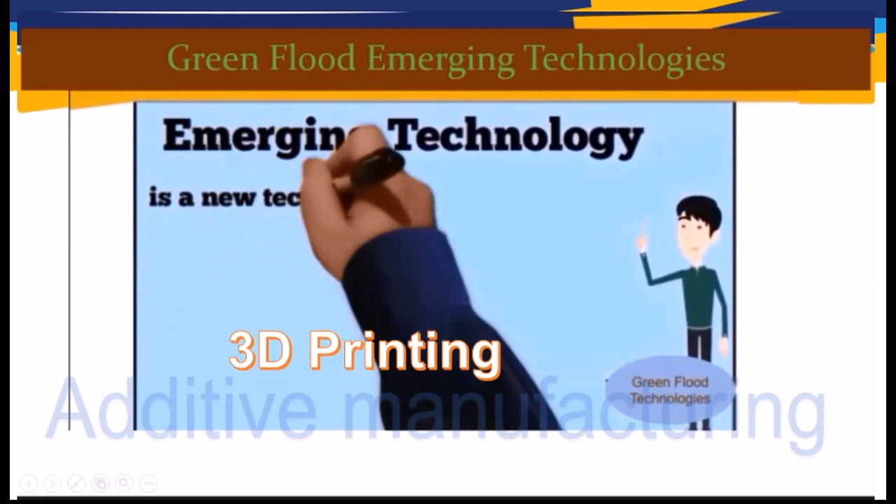Well, today I'm going to show you what is additive manufacturing and 3D printing. Are 3D printing and additive manufacturing the same thing?

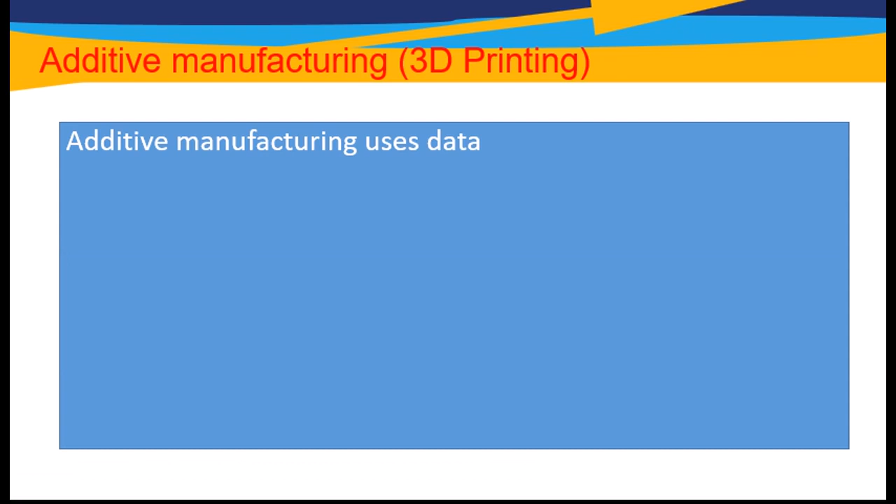Generally, we know that terms stretch over time to include more than just their default meanings. Whatever the name, new ways of fabricating directly from byte to stuff are radically changing the what, where, how, and when of making objects.

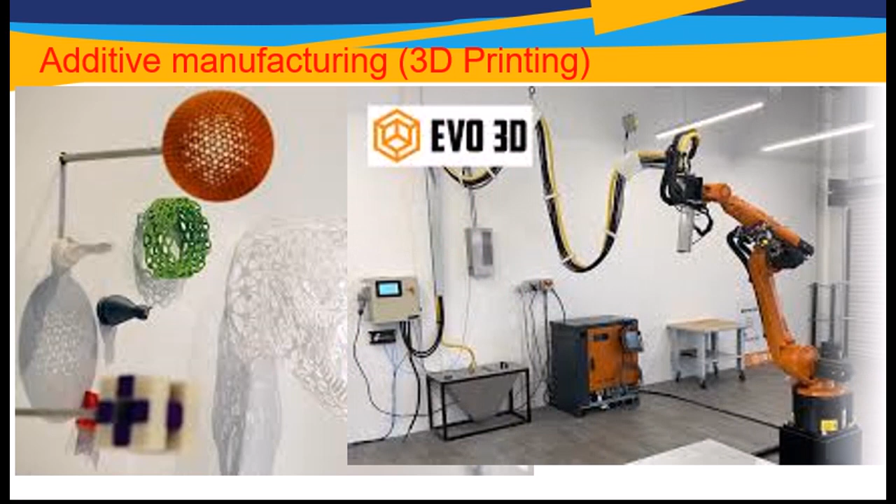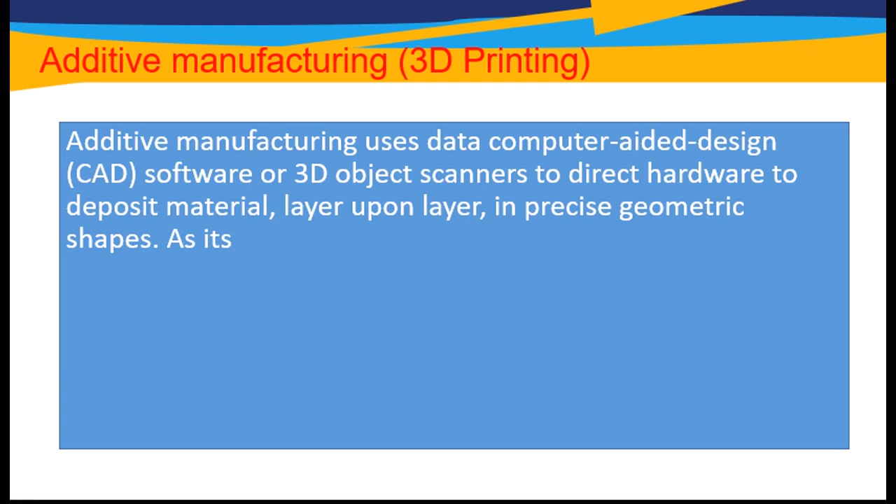What roles then do the two terms additive manufacturing and 3D printing play in describing new ways of making? Additive manufacturing uses data computer-aided design softwares or 3D objects scanners to direct hardware to deposit materials layer upon layer in precise geometric shapes. As the name implies, additive manufacturing adds material to create an object.

By contrast, when you create an object by traditional means, that means subtractive manufacturing, it is often necessary to remove materials through milling, machining, carving, shaping, or other means.

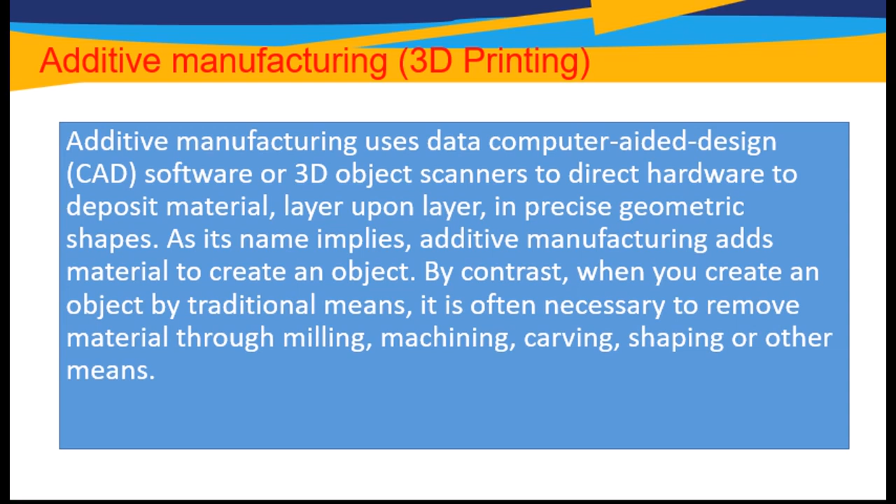Additive manufacturing, or additive layer manufacturing, is the industrial production name for 3D printing, a computer-controlled process that creates three-dimensional objects by depositing materials, usually layers.

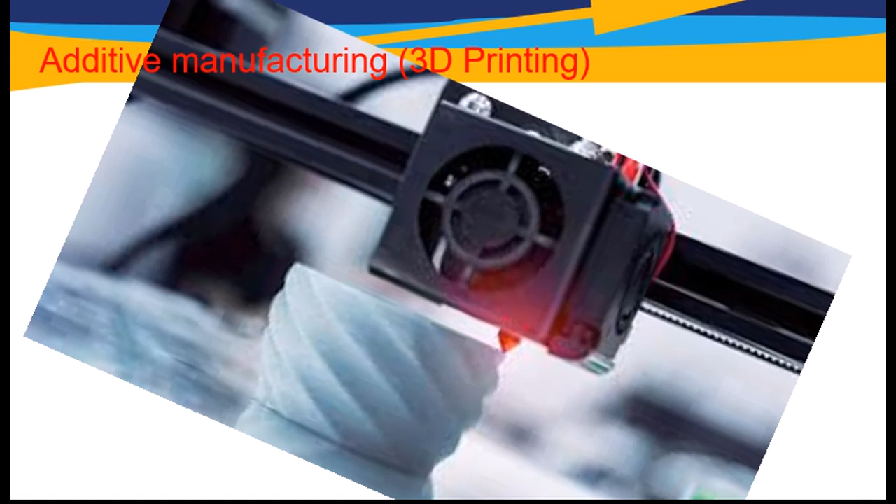When MIT invented binder jet printing in the 1980s, they wrote: 'Three-dimensional printing is a process under development at MIT for the rapid and flexible production of prototype parts, end-use parts, and tools directly from CAD models.'

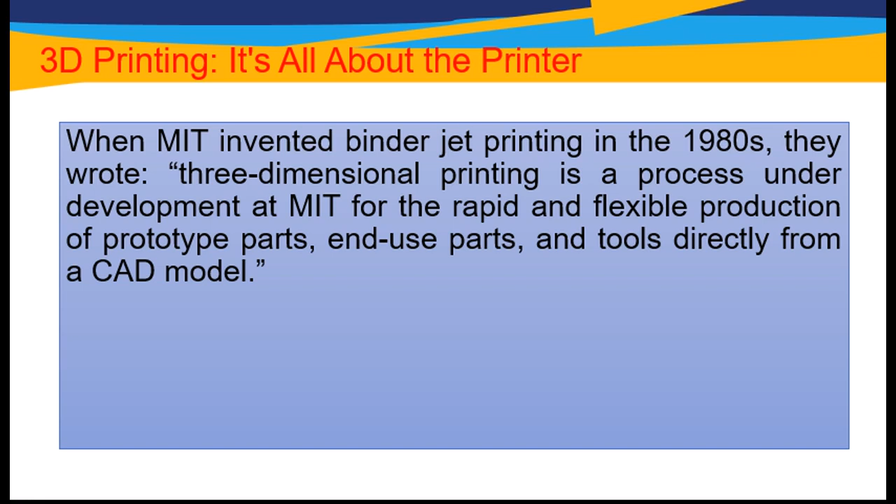Additive manufacturing was first used to develop prototypes in the 1980s. These objects were not usually functional. This process, known as rapid prototyping, allowed people to create scale models of final objects quickly without the typical setup process and cost involved in creating a prototype.

As additive manufacturing improved, its uses expanded to creating molds for final products. But by the early 2000s, additive manufacturing was being used to create functional products. More recently, companies like Boeing and General Electric have begun using additive manufacturing as an integral part of their business process.

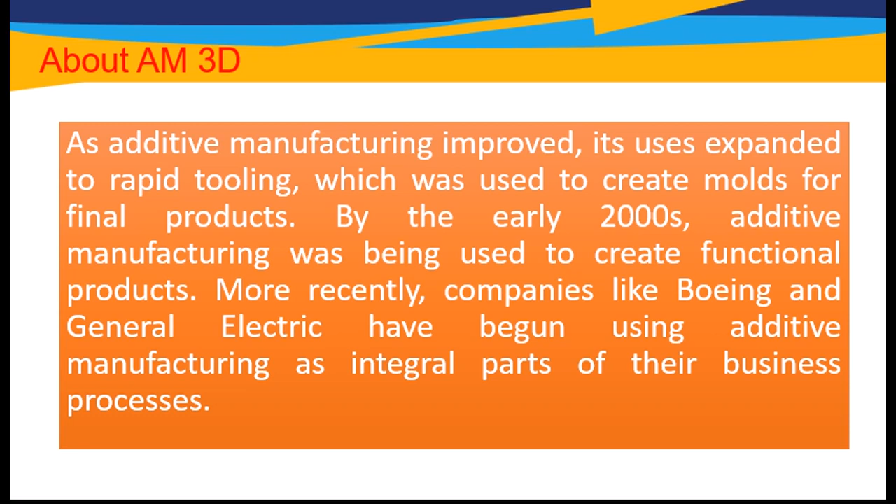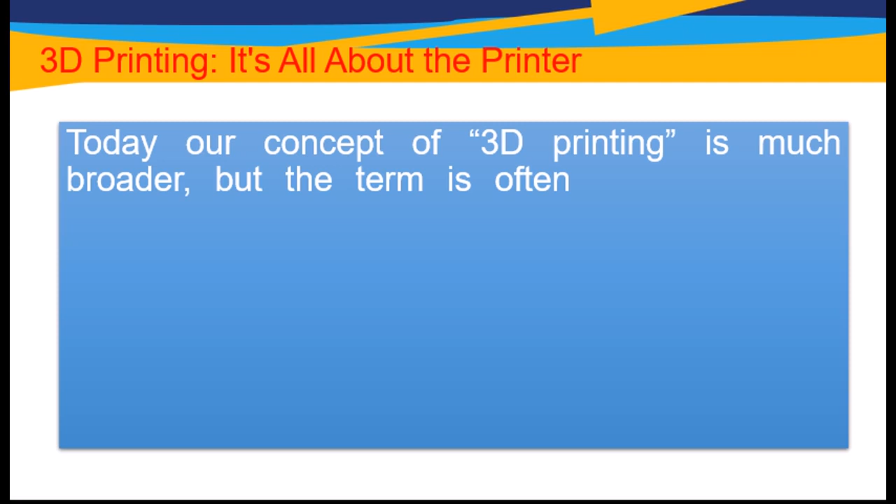Today, our concept of 3D printing is much broader, but the term is often associated with filament-based plastic printers, which are the pride and joy of many hobbyists and self-described makers. But there are also binder jet printers, laser sintering 3D printers, as well as glass and clay 3D printers.

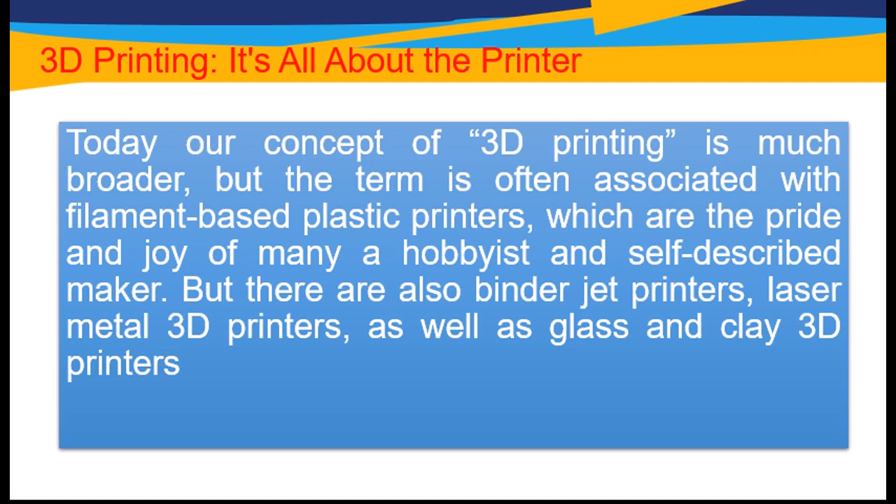Additive manufacturing versus subtractive manufacturing. Additive is the adjective. Additive means tending to or able to add. If a process is additive, it means that it is adding things. The adjective subtractive, on the other hand, means tending to or able to remove or subtract. A subtractive process is one that is removing or taking away things.

Subtractive manufacturing is the traditional way of making things. You start with a large block of something and gradually cut away bits of it until you have the desired object. We also call this process machining. Machining involves hollowing, cutting, or taking part out of a block of something. It could be a block of, for example, stock or material.

Additive manufacturing means creating 3D objects by starting with nothing, adding one superfine layer at a time. 3D printing is one type of additive manufacturing.

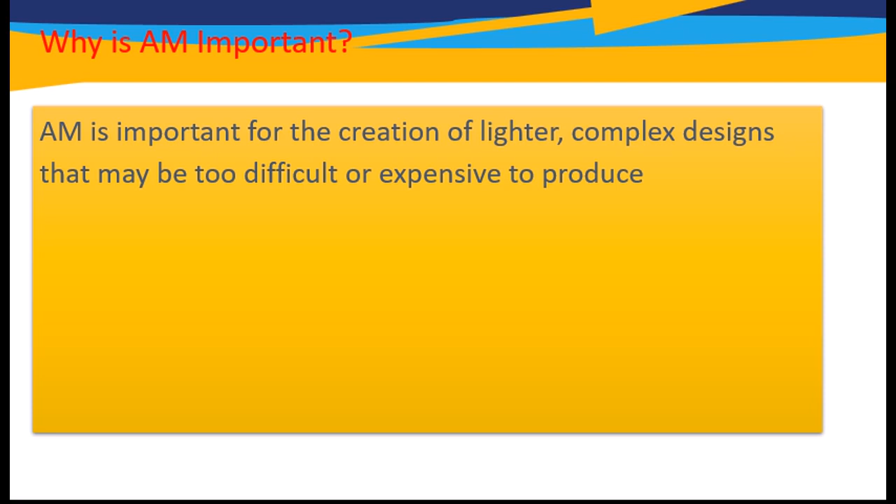Why is additive manufacturing important? Additive manufacturing is important for the creation of lighter, complex designs that may be too difficult or expensive to produce using traditional manufacturing techniques. Removing the need for molds, milling, and machining, additive manufacturing offers a range of advantages for both prototyping and production.

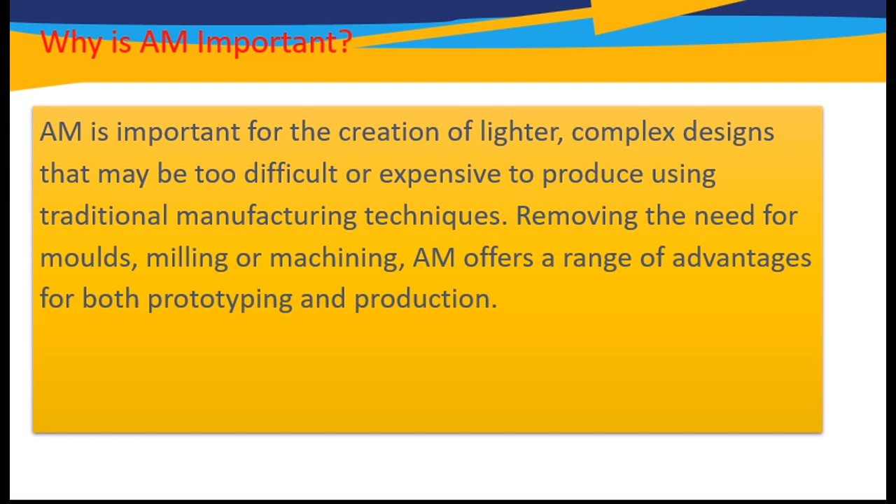What is that transformation? It may be something of a stretch to say that additive manufacturing will change the world, but it is already having a positive impact. It allows for the creation of complex designs with less material wastage compared to parts that require machining, as well as allowing for the creation of lighter structures. When these lighter structures are applied to aerospace or automotive applications, for example, they lead to fuel savings and related environmental and financial benefits.

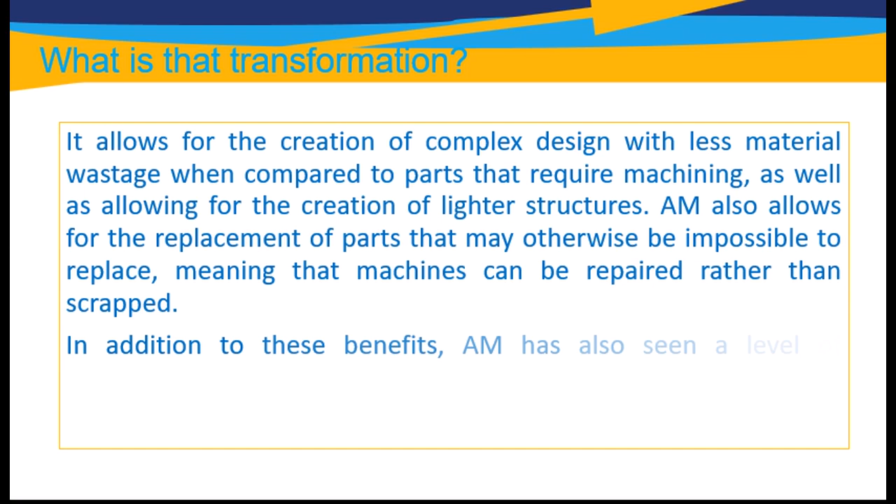Manufacturing also allows for the replacement of parts that would otherwise be impossible to replace, meaning that machines can be repaired rather than scrapped. In addition to this benefit, additive manufacturing has also seen a level of democratization of manufacturing as more people set up domestic 3D printing stations to produce their own bespoke items.

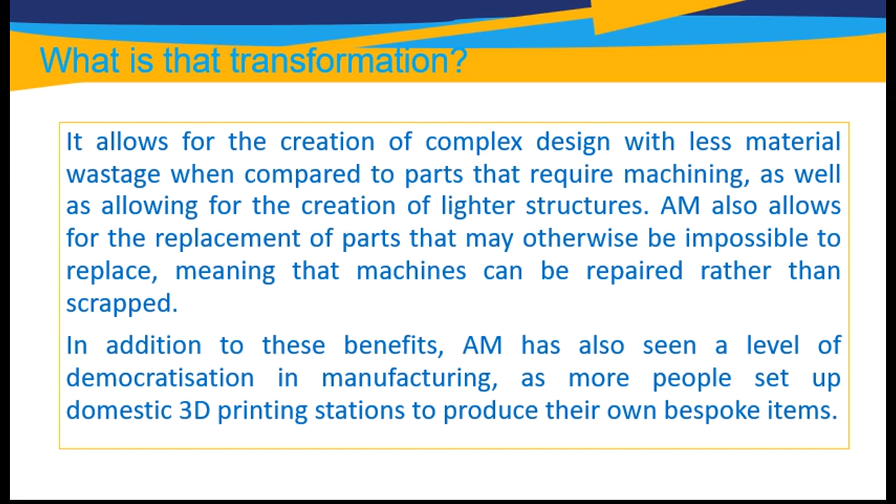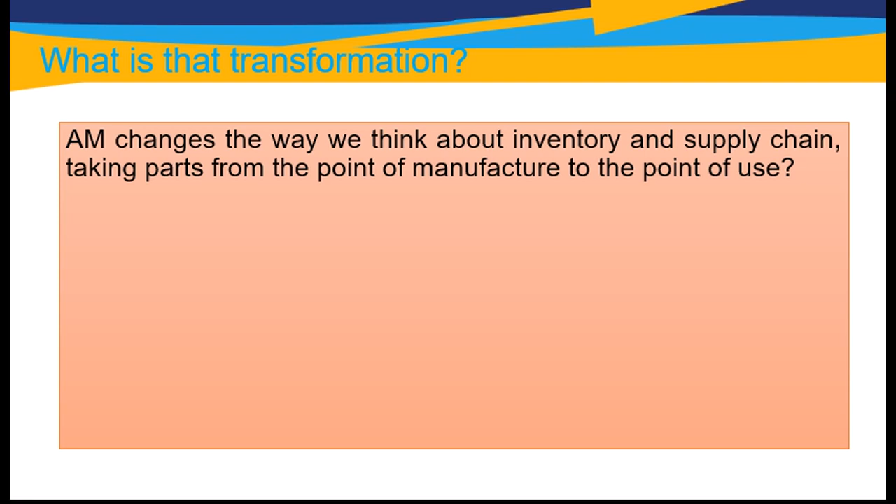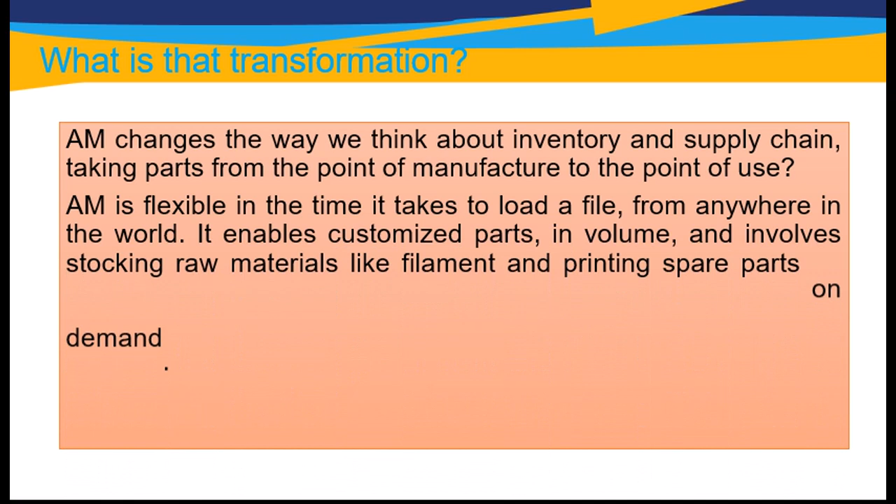Additive manufacturing technologies can be broadly divided into 3 types. The first of which is sintering, whereby the material is heated without being liquefied to create complex, high-resolution objects. Direct metal laser sintering uses metal powder, whereas selective laser sintering uses a laser on thermoplastic powder so that the particles stick together.

The second additive manufacturing technology fully melts the materials. This includes direct metal laser melting, which uses a laser to melt layers of metal powder, and electron beam melting, which uses an electron beam to melt the powder. The third broad type of technology is...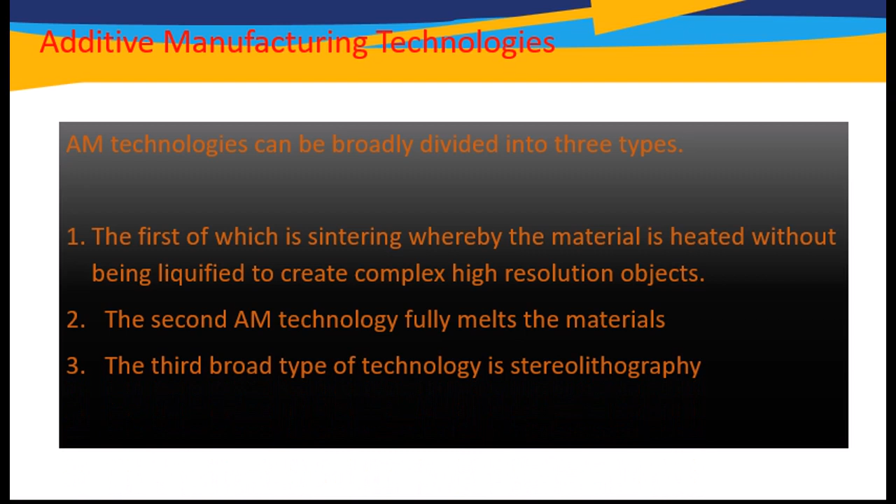Stereolithography, which uses a process called photopolymerization, whereby an ultraviolet laser is fired into a vat of photopolymer resin to create highly resistant ceramic parts able to endure extreme temperatures.

How does additive manufacturing work?

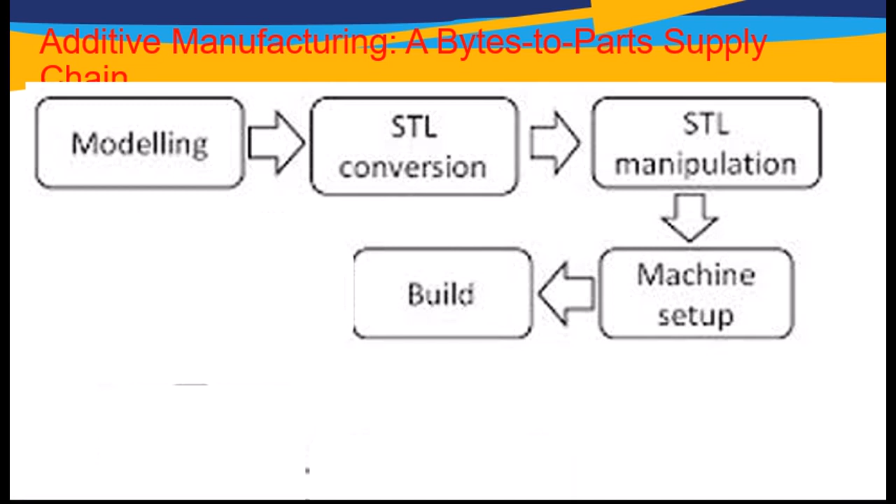Using computer design or 3D object scanners, additive manufacturing allows for the creation of objects with precise geometric shapes. These are built layer by layer, as with the 3D printing process, in contrast to traditional manufacturing, which often requires machining or other techniques to remove surplus materials.

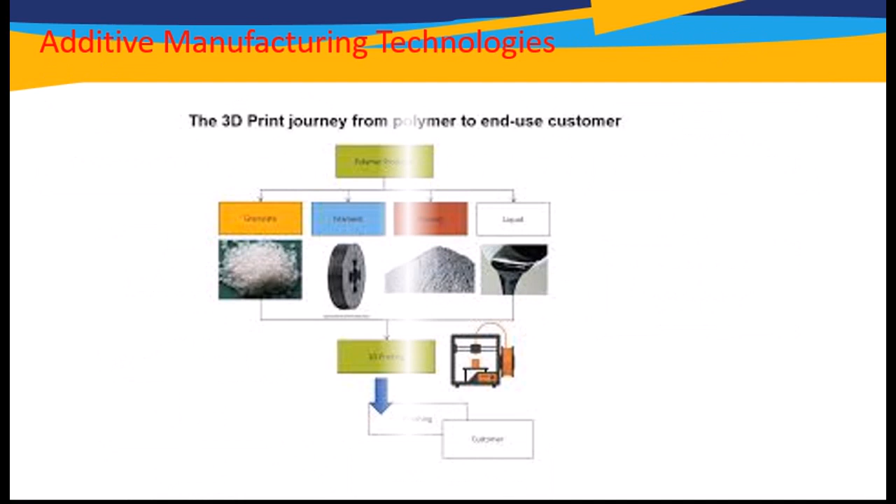Additive manufacturing processes. There are seven categories of additive manufacturing processes, including a number of distinct processes with their own standards.

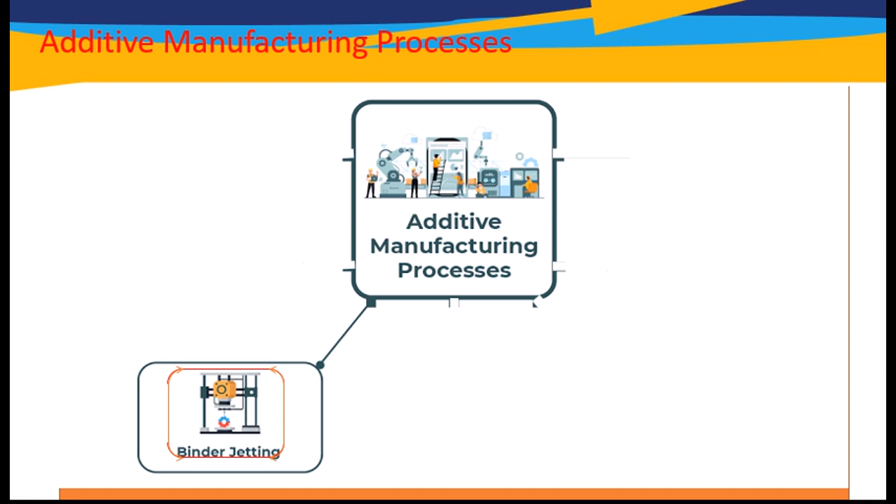Binder jetting. This technique uses a 3D printing style head moving on the X, Y, and Z axes to deposit alternating layers of powdered materials and liquid binders as an adhesive.

Second, directed energy deposition. This process can be used with a wide variety of materials, including ceramics, metals, and polymers. A laser, electric arc, or electron beam gun mounted on an arm moves horizontally, melting wire, filament, feedstock, or powder to build up materials as the bed moves vertically.

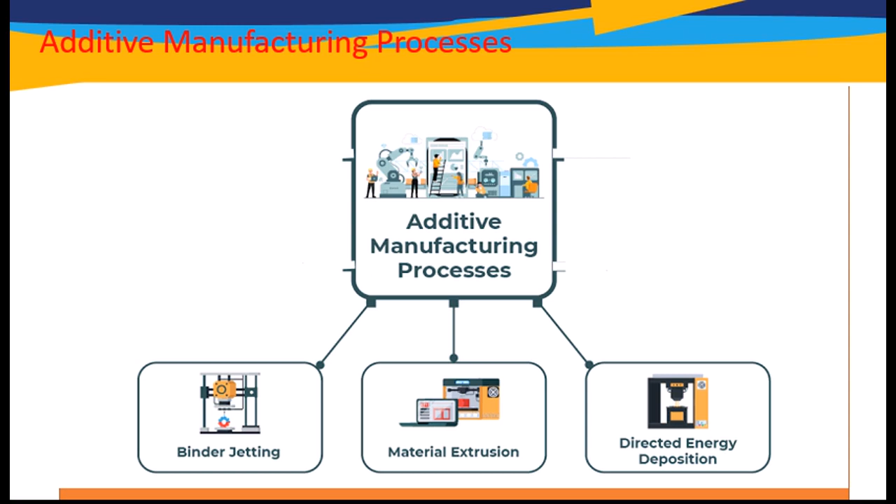Third, material extrusion. This common additive manufacturing process uses spooled polymers which are either extruded or drawn through a heated nozzle mounted on a movable arm. This builds melted materials layer by layer as the nozzle moves horizontally and the bed moves vertically. The layers adhere through temperature or a chemical bonding agent.

Fourth, powder bed fusion. This encompasses a variety of additive manufacturing techniques, including direct metal laser melting, direct metal laser sintering, electron beam melting, selective laser sintering, and selective heat sintering. Electron beam, laser, or thermal print heads are used to melt or partially melt fine layers of materials, after which excess powder is blasted away.

Fifth, sheet lamination. This can be split into two technologies: laminated object manufacturing and ultrasonic additive manufacturing. Laminated object manufacturing is suited to creating items with visual or aesthetic appeal, and uses alternating layers of paper and adhesive.

Ultrasonic additive manufacturing uses ultrasonic welding to join thin metal sheets, a lower energy, lower temperature process. It can be used with various metals such as aluminum, stainless steel, and titanium.

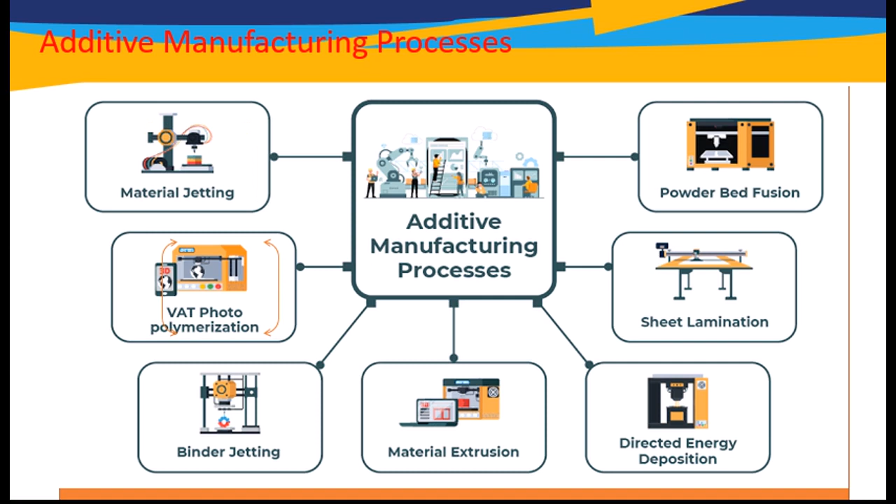What materials can be used in additive manufacturing? There are a variety of materials used, including biochemicals, ceramics,

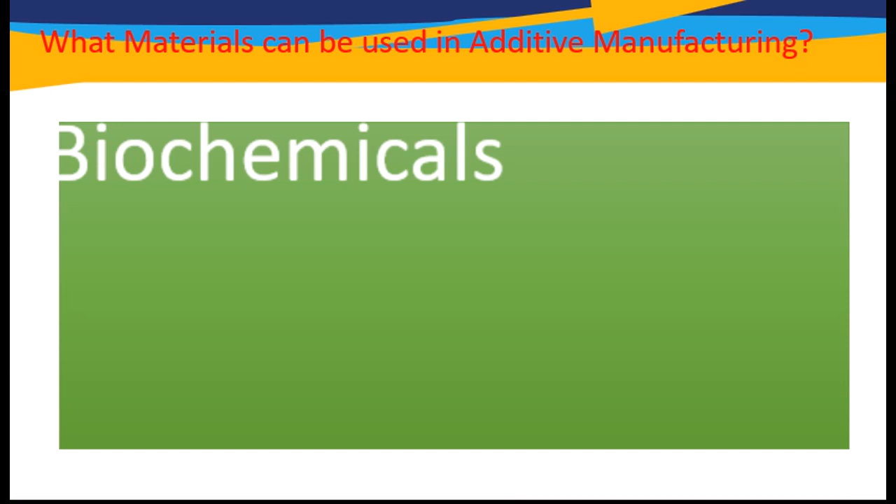Biochemicals used in additive manufacturing include silicon, calcium, phosphate, and zinc, while bio-ink fabricated from stem cells is also being explored. These materials are generally used for healthcare applications.

Ceramics. A range of ceramics are used in additive manufacturing, including alumina, calcium, phosphate, and zirconia, as well as powdered glass, which can be packed together with adhesive to create new types of glass products.

Metals. A wide variety of metals and metal alloys are used for additive manufacturing, including gold and silver, stainless steel, and titanium, among others. These can be made into a variety of different metal parts, ranging from jewelry to aerospace components.

Thermoplastics. Thermoplastic polymers are the most commonly used additive manufacturing materials, and include a variety of types with their own advantages and applications. These include acrylonitrile butadiene styrene, polylactic acid, and polycarbonate, as well as water-soluble polyvinyl alcohol, which can provide temporary support before being dissolved.

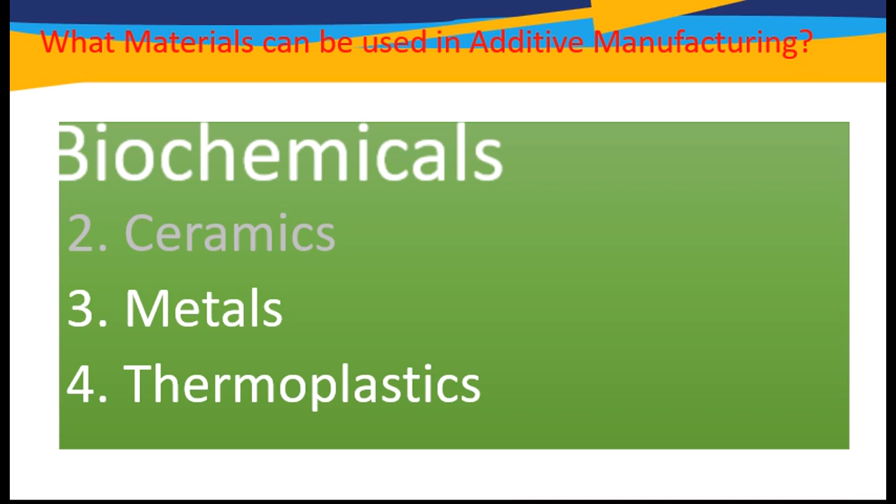Where is additive manufacturing used? Aerospace. Additive manufacturing is particularly suited to aerospace applications due to its weight-saving capability and ability to produce complex geometric parts such as brackets.

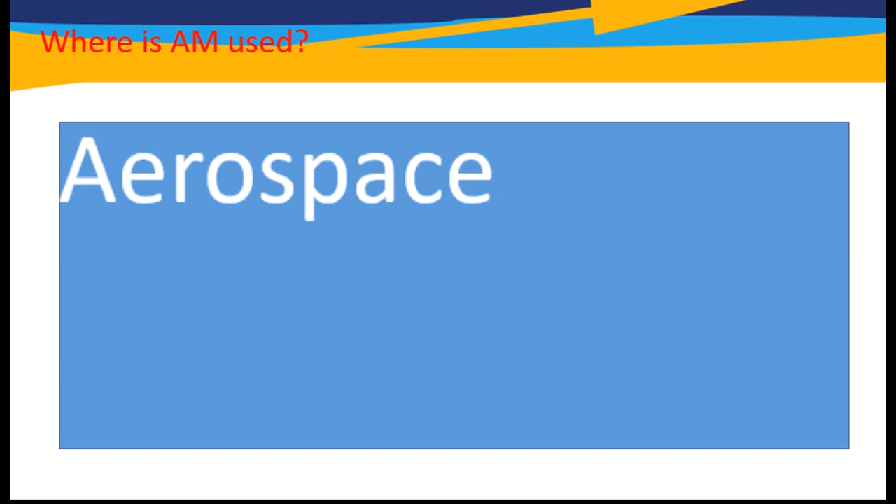Automotive. A variety of materials are widely used in additive manufacturing for the automotive industry, as they allow rapid prototyping while offering weight and cost reductions.

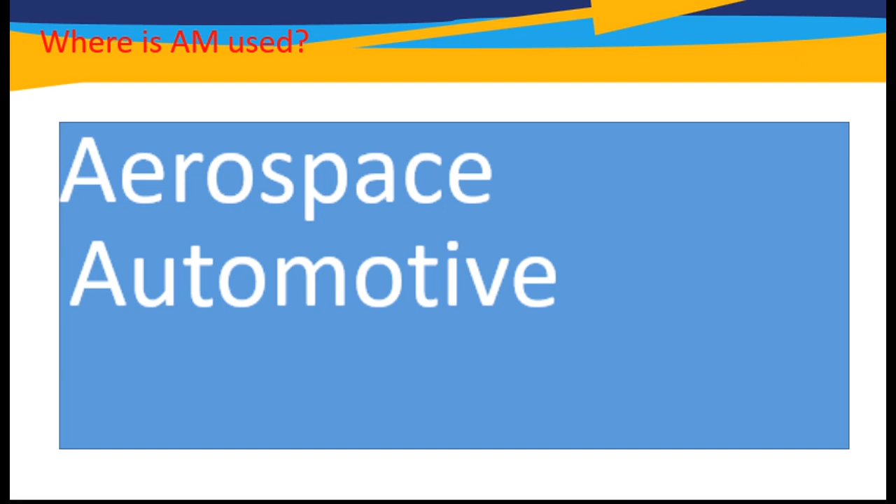Medical. The medical sector is finding an increasing number of applications for additive manufactured parts, especially for bespoke, custom-fitted implants and devices.

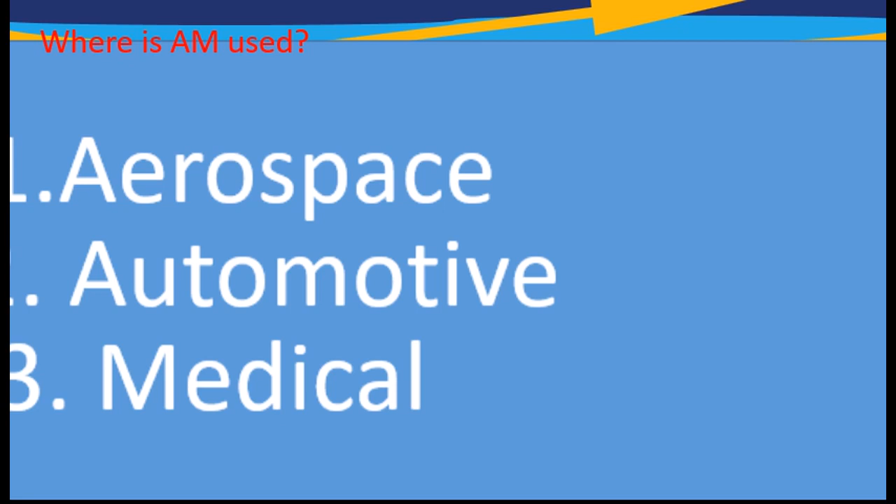Advantages, or what are some benefits of additive manufacturing? Number one is complex geometries.

The technology enables engineers to design parts that incorporate complexity not possible using other methods. Intricate features such as conformal cooling passages can be incorporated directly into the design. Parts that previously required assembly and welding or brazing of multiple pieces can now be grown as a single part, which makes for greater strength and durability. Designers are no longer restricted by the limitations of traditional machines and can create parts with greater design freedom.

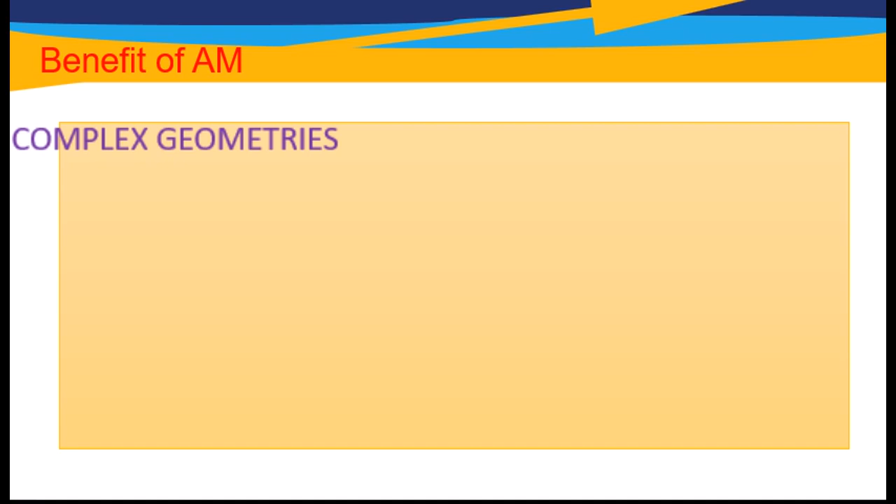The second advantage of additive manufacturing is time saving. It is ideal for getting prototypes made quickly. Parts are manufactured directly from 3D CAD files, which eliminates the cost and lengthy process of having fixtures or dies created. Plus, changes can be made midstream with virtually no interruption in the process.

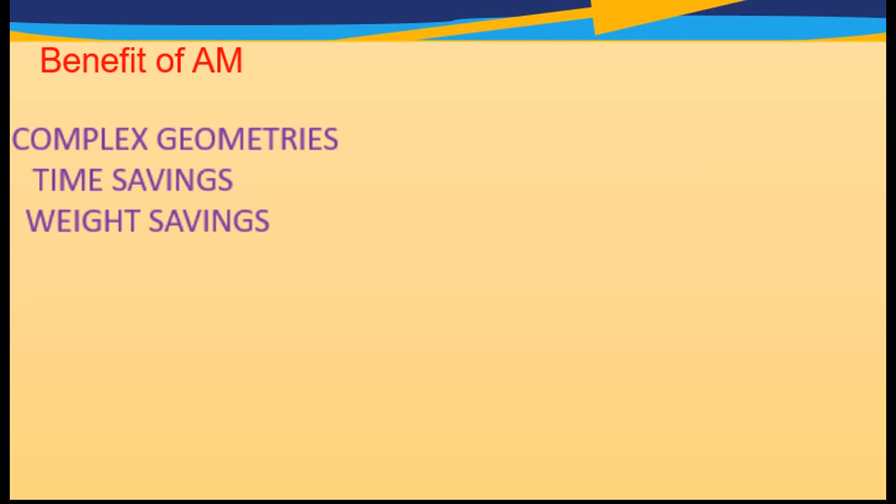Weight savings. By incorporating organic structures into design, designers can eliminate substantial weight while maintaining part strength and integrity. An illustration of this advantage can be seen in the bracket challenge conducted by GE. An existing bracket was redesigned for additive manufacturing, with the winning entry maintaining the strength of the original while reducing the weight by 84%.

This is all about additive manufacturing and 3D printing. Thank you.